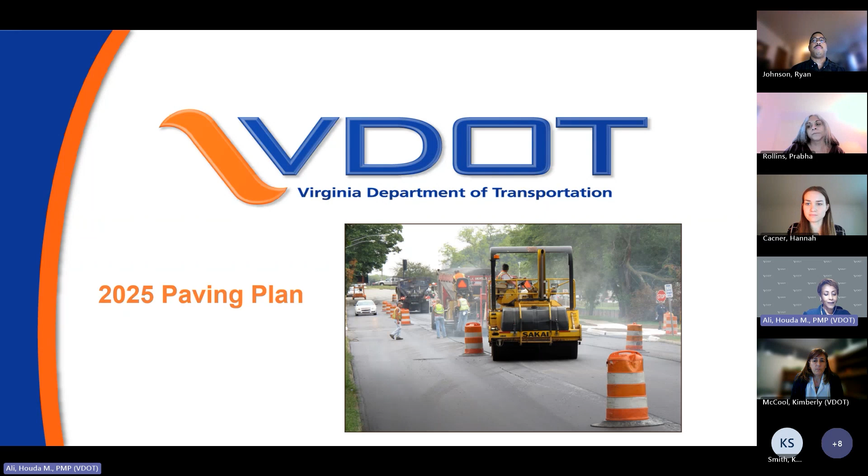Tonight we'll be covering the state lane mile inventory and the lane mile inventory for Nova District, as well as the planning and construction phases of the repaving program. We'll also go over the process of how roads get selected for paving and how pavement condition is determined using the CCI rating system. We'll present information about our dashboard and pavement condition targets, the various types of pavement treatments, this year's budget, and the different types of pavement markings and striping, before transitioning to the county's presentation on the topic.

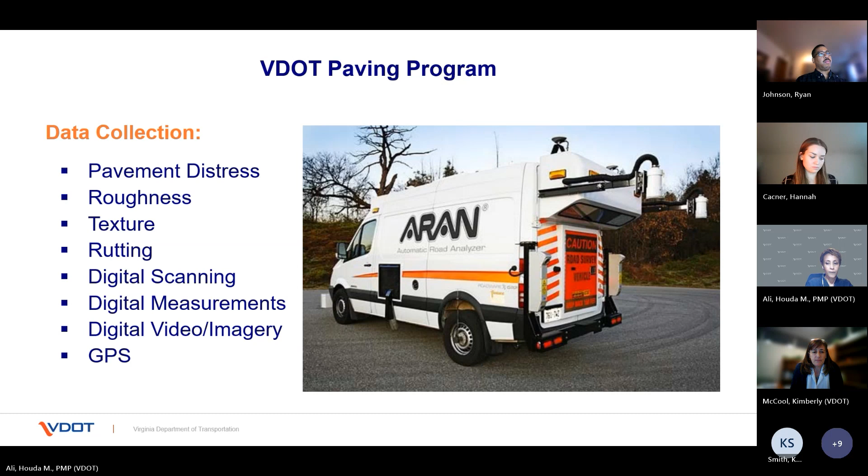The frequency of data collection depends on the type of roadway. Data is collected annually for interstate, primaries, and high-volume secondaries with average annual daily traffic higher than 3,500 vehicles per day.

For low-volume secondary roads below 3,500 vehicles per day, with route numbers of 600 or higher, which make up the majority of lane miles including residential streets, we collect data on 20% every year, with the goal to cover the full lane mile inventory every 5 years.

Once the pavement condition data is collected and analyzed, it gets translated into a rating system on a scale from 0 being worst to 100 being best, like in the case of a new road. The rating system we use is called CCI, Critical Condition Index. We focus on very poor and poor roads with sufficiency ratings below 60 CCI. We don't pave roads with ratings higher than 60 CCI.

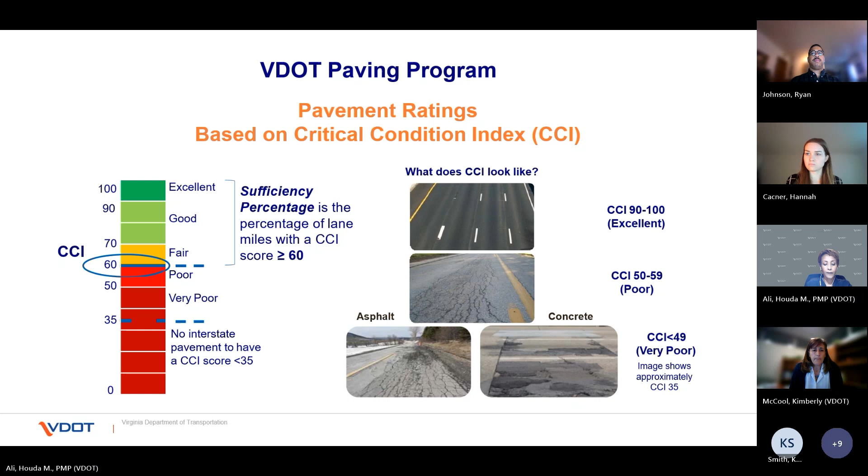This data is also used to inform budget allocation decisions. On this slide, you see a screen capture of the VDOT pavement condition map.

In general, there are two main types of treatments. Preventive maintenance treatment, where we try to extend the life of pavement by applying slurry seal. We also do limited patching and crack seal. Candidate roads for this type of treatment are typically not in poor condition and have CCI ratings of 60 or above.

In regards to corrective maintenance, we do mill and overlay, 2-inch most commonly, and up to 4-inch depending on the pavement condition. This treatment is the most common and targets roads in poor condition. In rare occasions, we may have to replace the pavement to full depth and rebuild the road. Roads targeted with this type of treatment are typically very old and built to old standards.

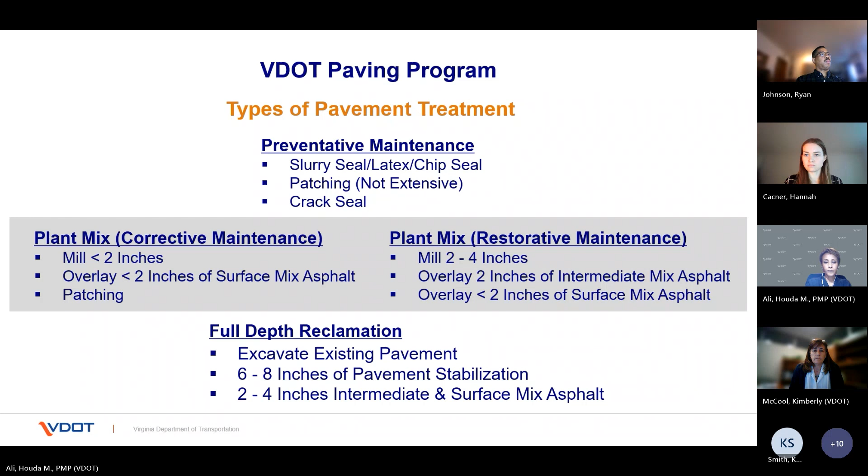I wanted to note that our infrastructure and maintenance teams have determined that about 43% of our low volume secondary roads have combined critical condition index ratings in the 30s and 40s, indicating very poor condition and are due for repaving. At current funding levels, we're only able to pave about 6% of the road network each year. Nova District continues to work diligently to catch up on paving roads across Northern Virginia. Until the roads are ultimately repaved, the maintenance team will continue to monitor and treat roads for emergencies and safety-related issues such as potholes and needed patching.

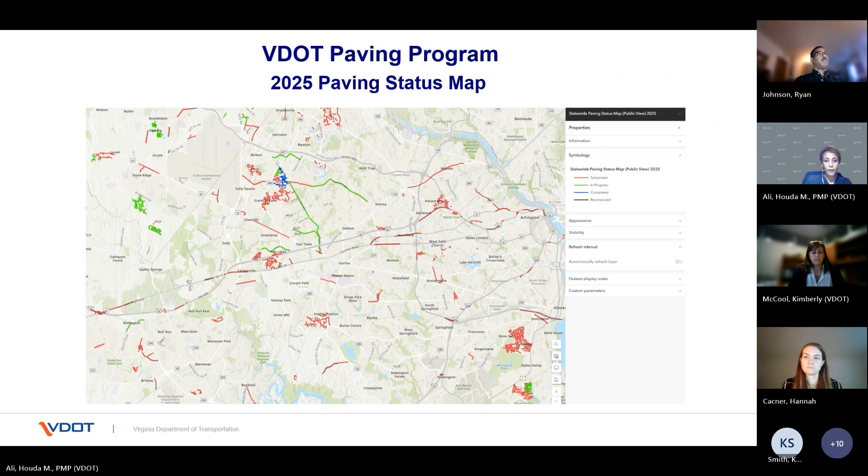VDOT restripes most commonly to replace in kind, as in put back what was existing before we mill and repave the road. We may occasionally restripe to improve a traffic condition, traffic operation, and safety condition. We also take the opportunity of repaving to collaborate with the county to implement new marking patterns, if existing pavement width allows, to enhance on-road bike routes, and to add new crosswalks where feasible to improve pedestrian safety.

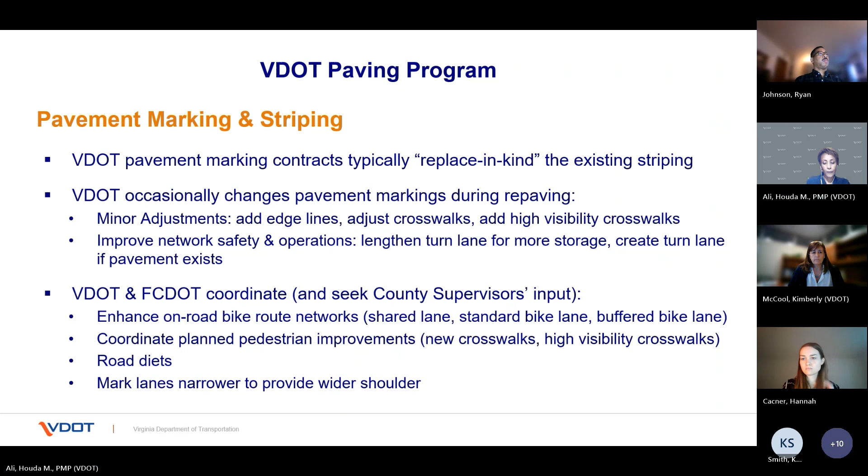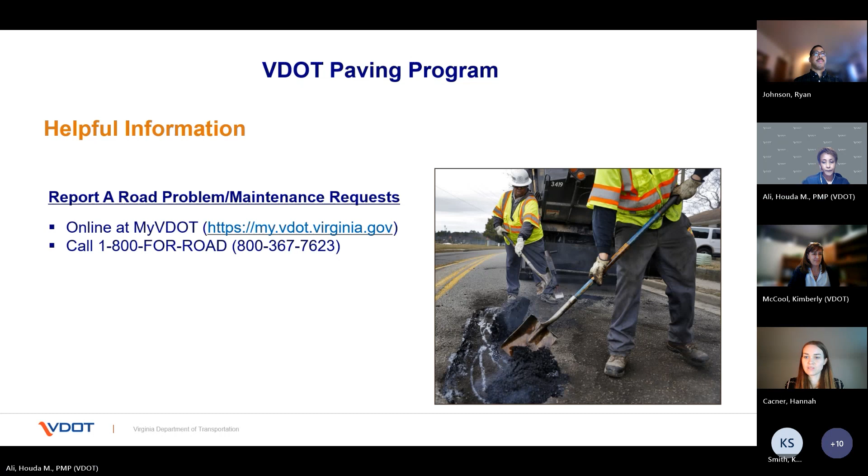Good evening, everyone. Again, my name is Hannah Cacner, and I am an active transportation planner with Fairfax County Department of Transportation. I'll be spending the next part of this meeting talking about FCDOT's role in the repaving program and also presenting our proposed striping improvements in Sully District. This year, we do not have any proposed striping projects in Dranesville District.

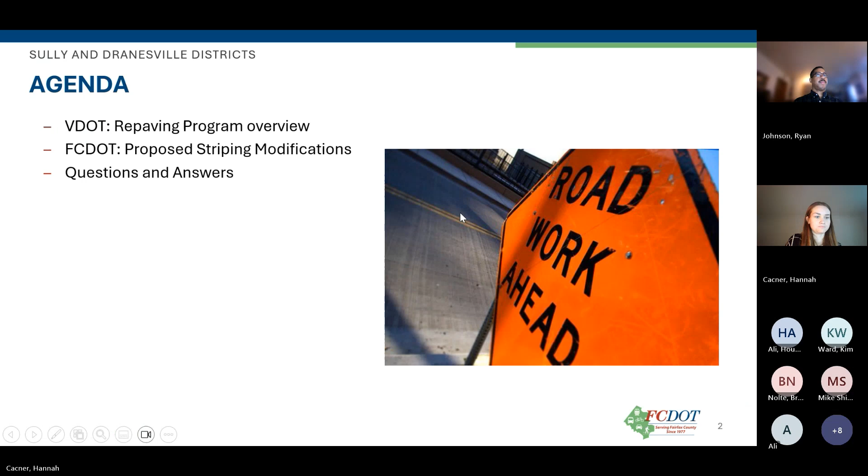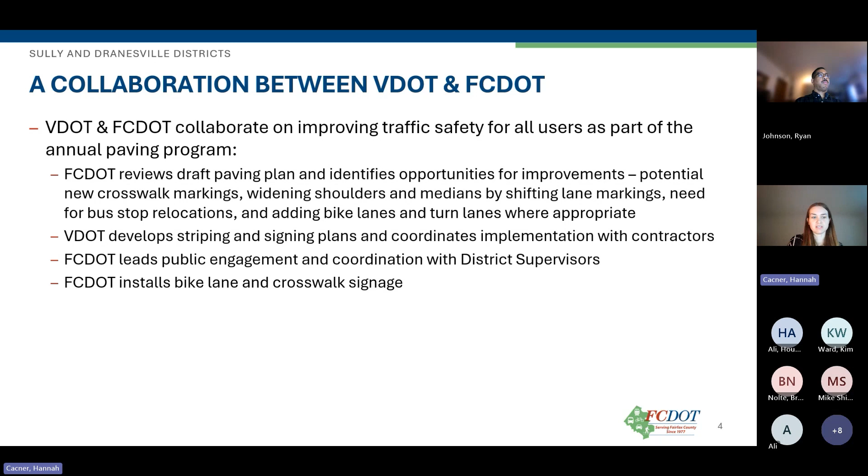Each year, VDOT and FCDOT collaborate on providing safety improvements for all roadway users as part of the annual repaving program. That process starts with FCDOT reviewing VDOT's draft paving list and identifying any opportunities for improvements, which can include new crosswalk markings, bike lanes, and road diets. We sometimes propose other striping improvements, but those three that I just mentioned are definitely the most common. From there, VDOT develops the striping plans and the signage plans for implementation right after the road is repaved. FCDOT leads public engagement efforts, and once the striping is complete, we'll go ahead and install any bike lane and crosswalk signage.

Each year FCDOT proposes a number of different bike lane projects to be implemented through the repaving program. A big reason we do this is to repurpose underutilized roadway space. Many of the roads in Fairfax County were built with wider than necessary travel lanes, or too many travel lanes than are really needed, which can lead to safety issues like speeding and inattentive driving. Repaving gives us an opportunity to right size those roadways by narrowing the travel lanes, and converting additional lanes into bike lanes and/or center turn lanes at relatively little cost. This also helps us implement our planned bicycle network at a pretty low cost, relatively speaking, because it is much less expensive to add new pavement markings when the roadway is being repaved.

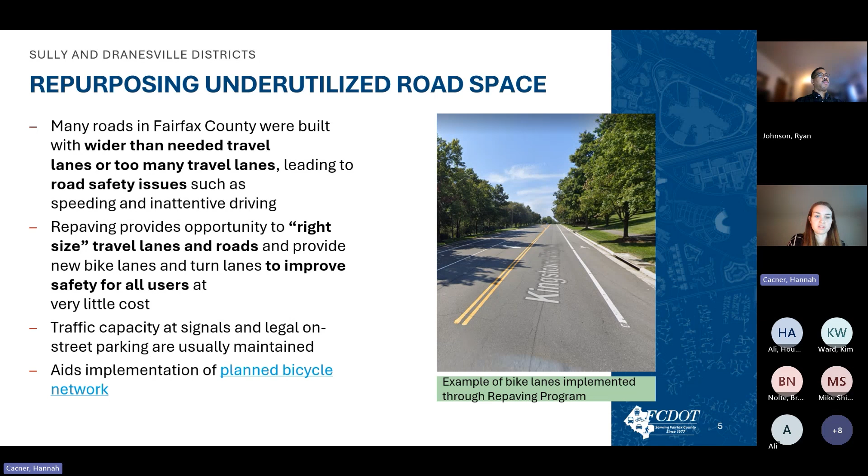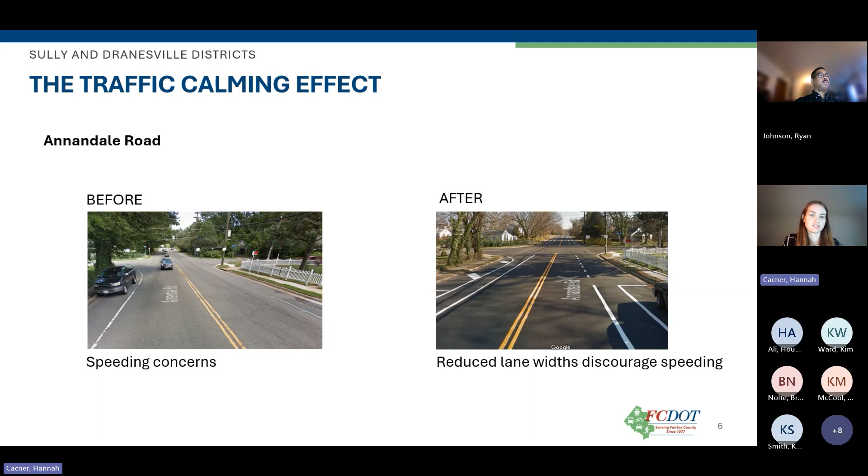This is an example of bike lanes that were added through the repaving program on Annandale Road a few years ago. As you can see from this photo, you get a really nice traffic calming effect through adding those bike lanes. With that additional striping, drivers are given a visual impression that the roadway width has been reduced, which has been shown to slow vehicle speeds overall.

This diagram shows a categorization of the four types of cyclists that we typically see in Fairfax County. While we're not able to build trails or protected bike lanes through the repaving program, we are trying to provide as many buffered bike lanes as possible where space allows, to try to appeal to that interested but concerned group that you see here.

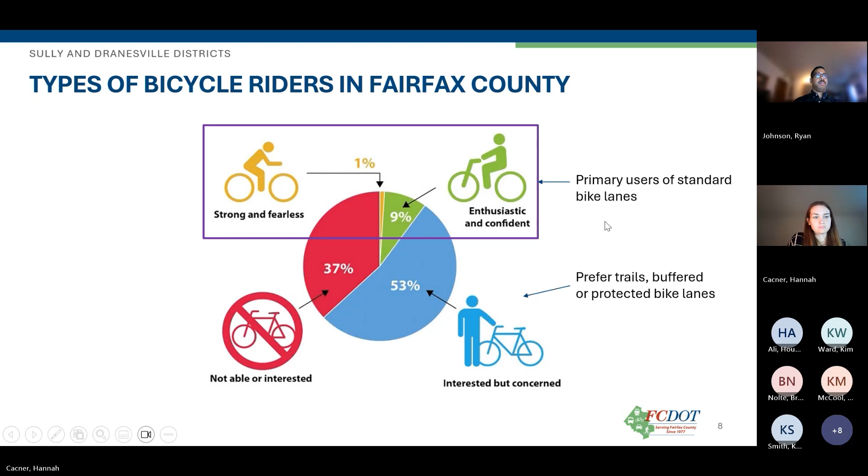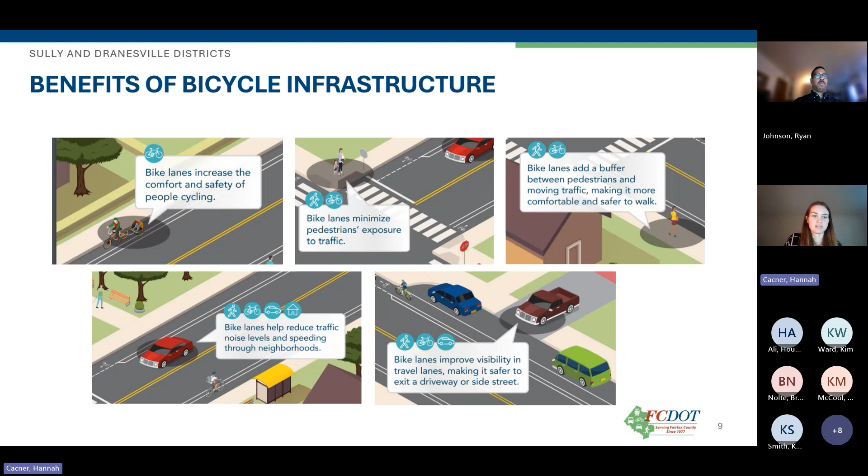This is a diagram that shows a few of the benefits of adding bicycle infrastructure. As you can see, bike lanes provide benefits to all roadway users and not just cyclists.

Moving on to one of our planned striping projects for Sully District: this year we will be implementing a road diet on Metrotech Drive by adding a center turn lane and bike lanes from Centreville Road to Route 50. Those bike lanes will be buffered where there's enough roadway width to do so, and the bike lanes will end ahead of each of the signalized intersections at Route 50 and at Centreville Road in order to reduce potential delays at those intersections.

There's also currently a double left turn coming off of Route 50 onto Metro Tech, and that will remain in place. So the road diet will begin just past the Route 50 intersection following a lane merge, and that's where the road diet will start.

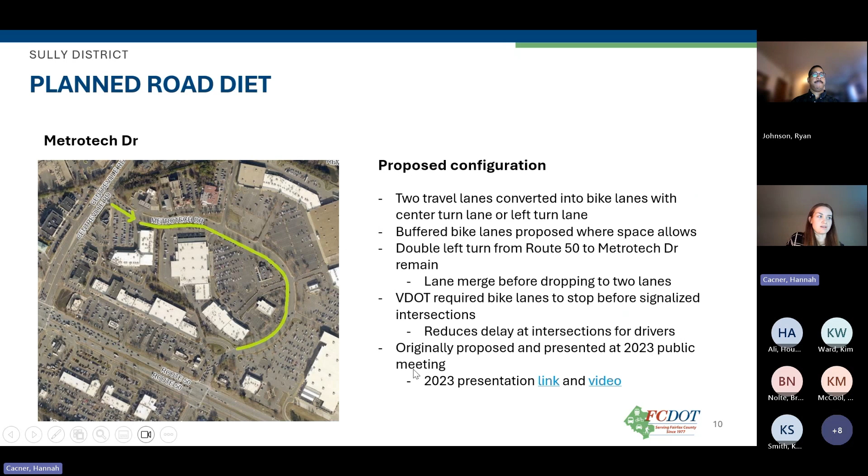The risk of angled crashes is also reduced because drivers really only need to turn across one lane instead of two. And finally, the risk of side swipe crashes is also reduced because adding that center turn lane eliminates the need to pass around stopped left turning drivers.

An additional benefit of adding the center turn lane is that it keeps traffic flowing, because when you're removing left turning drivers from the travel lane, it's easier for traffic to move more freely. Having fewer lanes can also help discourage speeding between the lanes.

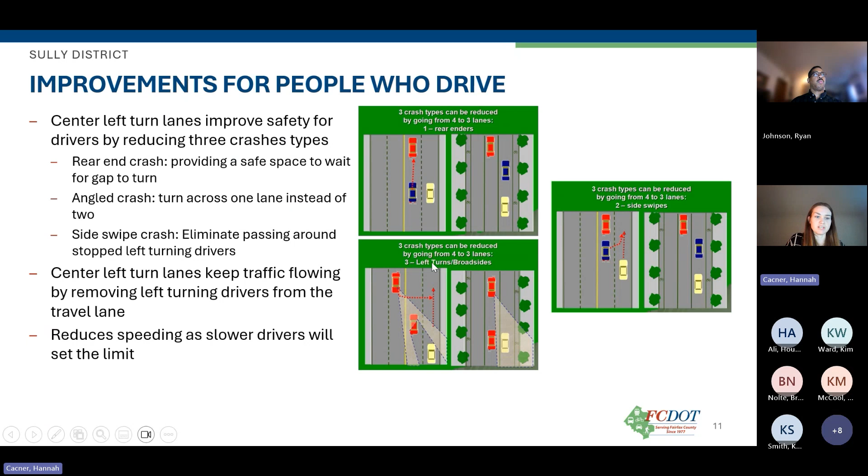In terms of improvements for people who ride bikes, having the bike lanes here will delineate space for riders and reduce the level of traffic stress for people bicycling, which will ideally attract riders of varying ages and abilities. In other words, while I'm sure very few people are riding their bikes on Metrotech right now, given how dangerous it would feel to do so, the goal in providing these bike lanes is to make it so more people feel safe enough to ride their bikes on Metrotech.

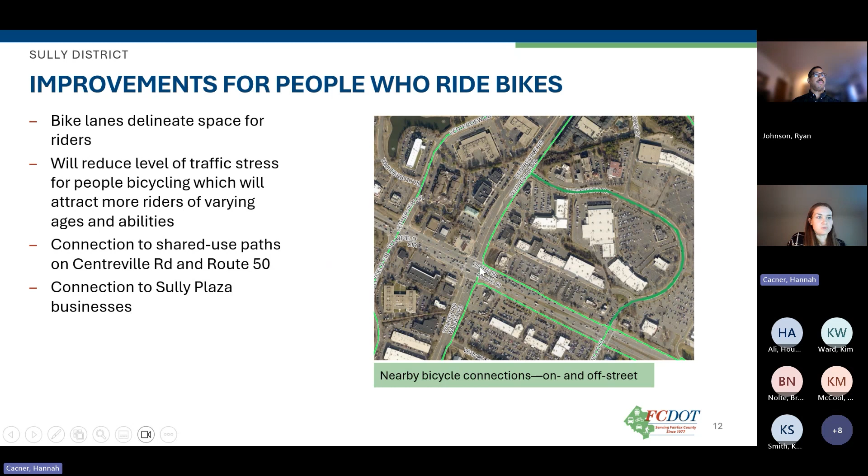In terms of connections to these bike lanes, we have existing shared use asphalt paths on both Centreville Road and Route 50, as you can see in this aerial image, marked in the lighter green color.

We are also proposing to add bike lanes along a short segment of Stonecroft Boulevard between Avion Parkway and Murdock Street by converting the two outer travel lanes into buffered bike lanes. The reason this segment is so short is just because of the paving limits on Stonecroft Boulevard this year, but we always have the option to extend them through future paving cycles when the opportunity presents itself.

You will have the opportunity to weigh in on this project through a public input survey, and I'll have more information on that at the end of this presentation.

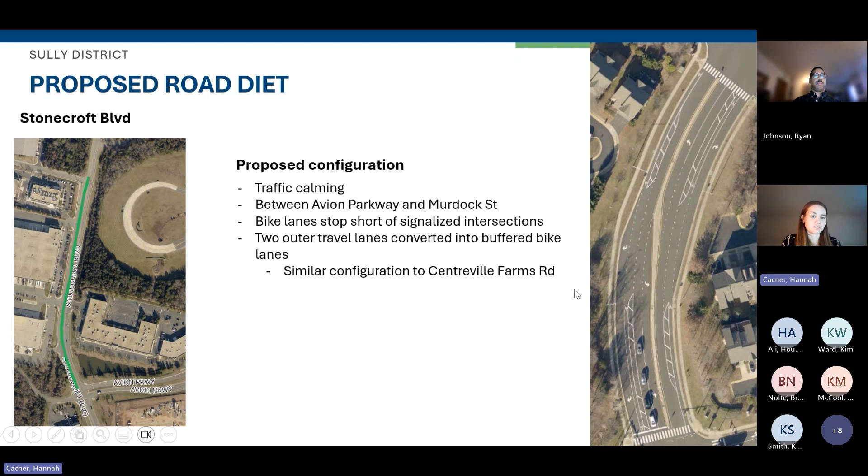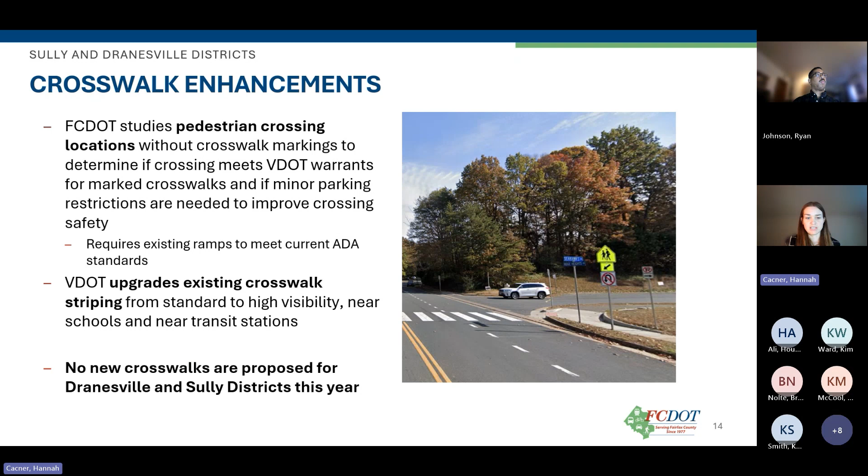We also typically propose crosswalk enhancements as part of the repaving program. However, this year we are unable to add any new marked crosswalks in Dranesville or Sully District. The reason is that current VDOT guidelines on adding marked crosswalks through the repaving program now require the existing curb ramps at that intersection to meet the current ADA standard. So based on the streets on this year's repaving list, we had very limited opportunities to add marked crosswalks across the county as a whole, given this guidance.

So that just wraps up my presentation for the evening.

But before we move on to the Q&A portion of the meeting, I just wanted to make a couple of notes on community feedback. If you have paving related comments, including drainage issues, missing signage, signal repair, walkway repair,

As I mentioned, because feedback was already collected back in 2023 on Metrotech Drive, we will not be collecting additional feedback on that project.